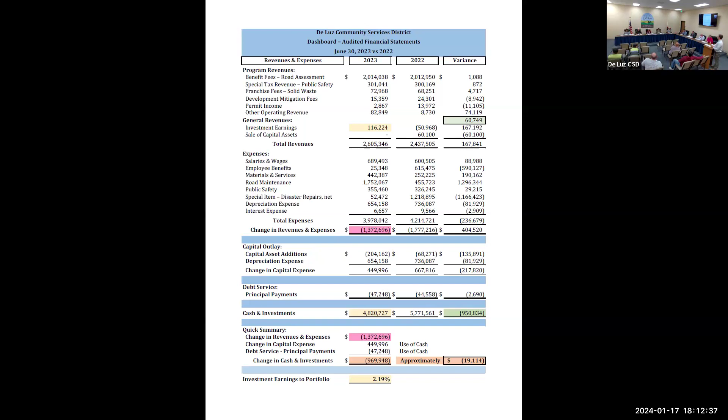Got it. Any other questions or comments? No. Oh, quick question, one quick question.

I think there's something we're curious about, something Jim was talking about last time we spoke, about the gas tax. Is there any movement on that revenue? Well, that's the next item. We're gonna sit tight for a little bit, we're gonna have another bill.

And then our lobbyist is on the screen, and he's gonna give a report to the board about where that stands. So stay tuned. Will California be nice and approve?

Yeah, we're still, just don't place any odds right now, but we're being optimistic. Very good, thank you very much.

Well, thank you, thank you. Good job, everybody. Thank you, Robert. Thank you, Colin. Yes, thank you, we met our commitment.

Very good, okay, moving along here. Agenda E, information. The following items are intended for information purposes only, and they include the financial statements, second statement of investment policy. Directors, any comments or questions?

No? Okay, then we'll move on to the next item here very quickly, and that will be Agenda F, the consent calendar. That includes the minutes of the December 1st, 2023 special board meeting, minutes of the December 2023 regular board meeting, general fund claims for December 2023, sheriff's special tax claims for December 2023, and purchase orders, of which there were none.

So he's gonna just show you a little bit about that project. It's really not significant anymore, but it sure could have been. So anyway, go ahead and show them what we have.

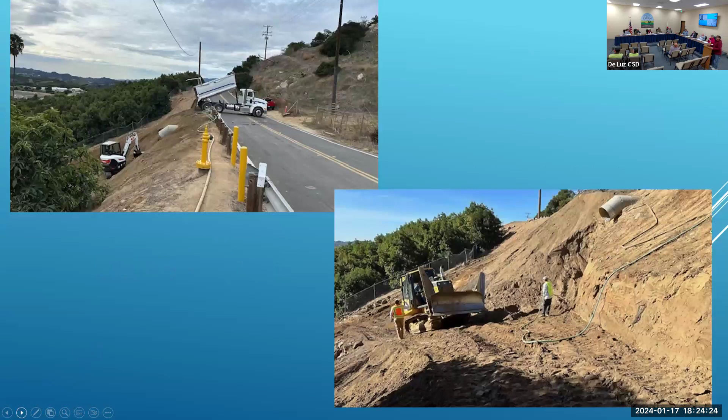Hi everyone, I'll start with this emergency work, which we had, and it's now completed. This is how it looked when I inspected it. This is where they are dumping dirt to fill up that hole.

The second step, in the lower picture, you'll see they are cutting into benches. We had it tested on site, and we approved all the compaction on it.

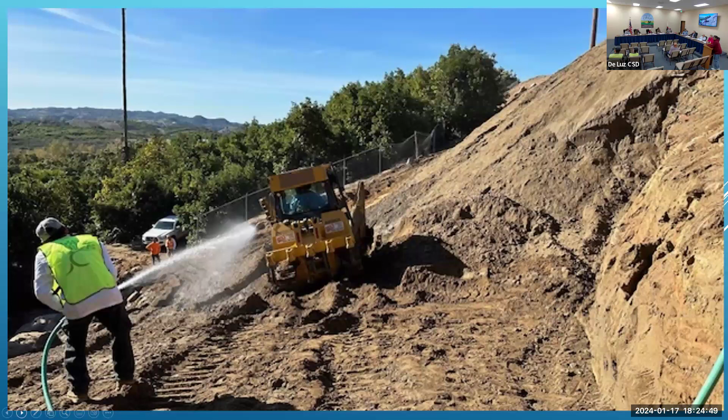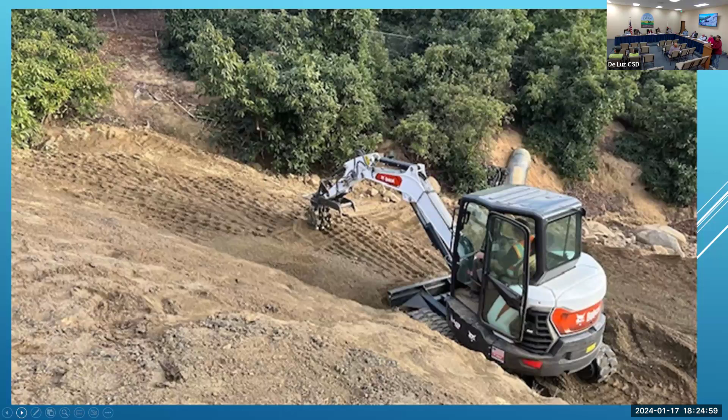Next picture, they are rocking around that washout. Next, they're compacting it here, layer by layer, bench by bench.

This is pushing dirt on the other side, where you saw all the ruts in the beginning. All these ruts are being filled up and pressed down for compaction. He's just tracking it.

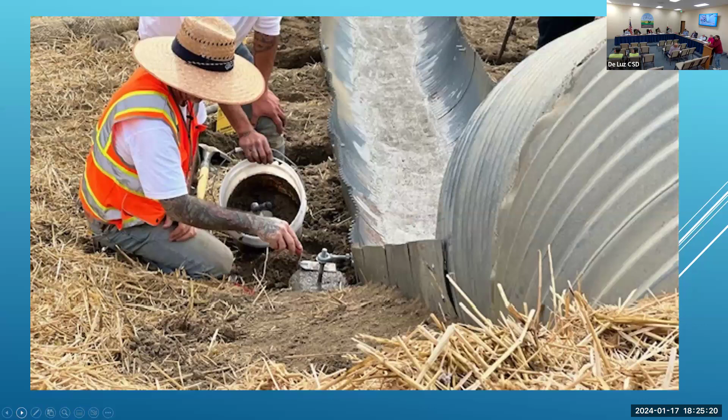This is a picture of our outlet drop, or half the pipe, where the water goes from top to bottom. We are putting anchors on each joint. There were 10 joints, 10 feet each, so 100 feet total from top to bottom.

So every joint is being anchored. You see that anchor, he's putting it in there. Next picture—they're working, so they're on the second one now.

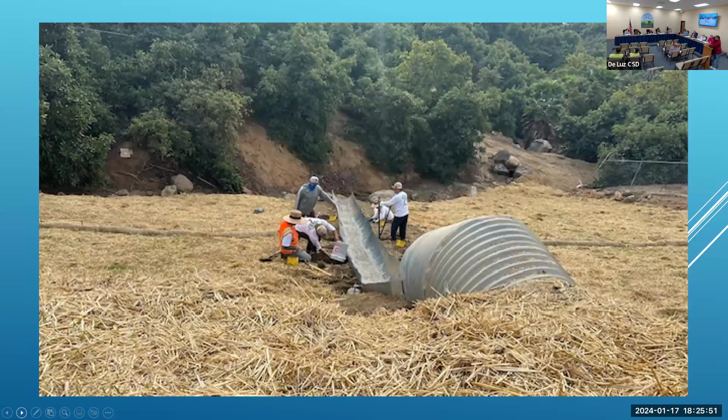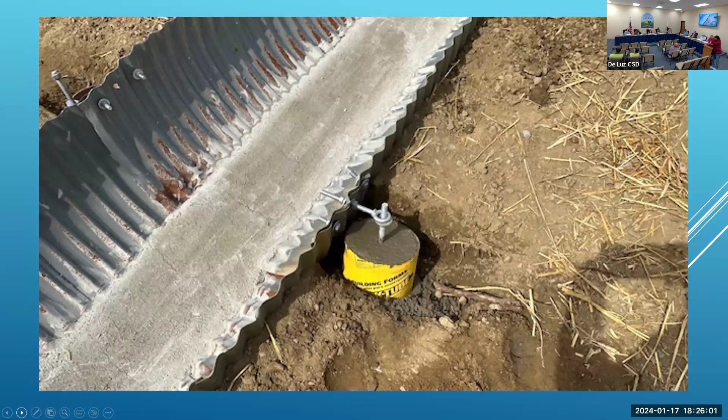This is how it looks. They put a bolt on top, a nut, to tighten it up, double nut, so nobody can take it out. Next picture, please—this is final, that's how it looks right now.

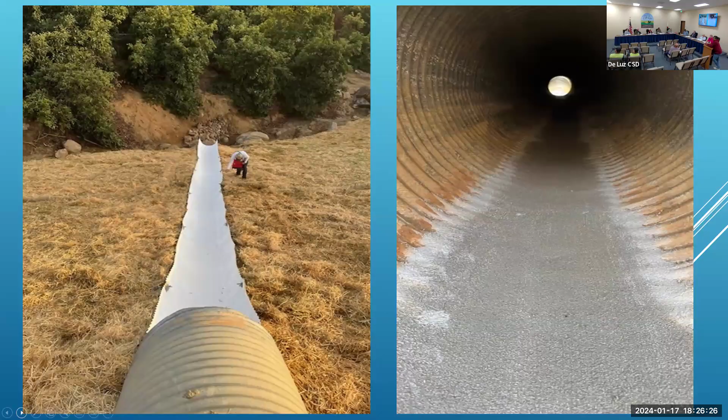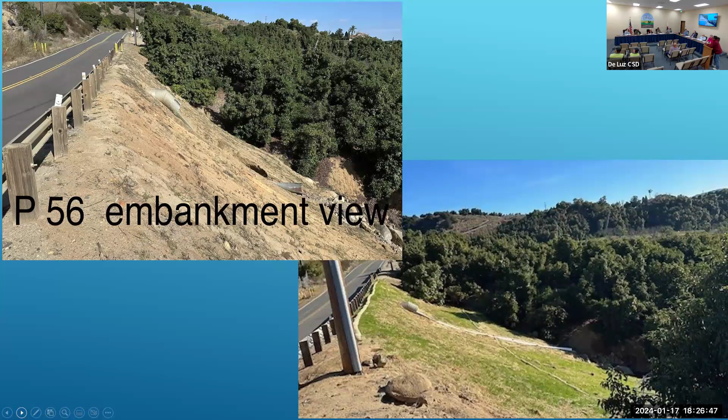This is the embankment on top, how it looked in the beginning. At the bottom, you see the grass growing with the BMPs on top and sweep stuff, so there shouldn't be any washout. If it occurs from the rain, it will stop it.

Next, this is on the north side now. We are not on the embankment side anymore, we are on the north side of the road. There was no way the water would have made it to that catch basin, or culvert.

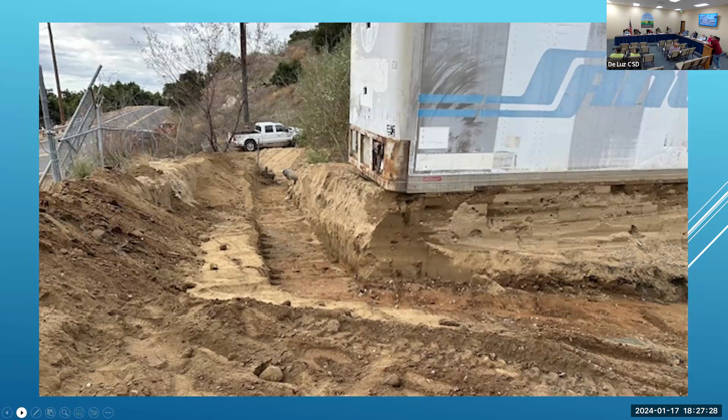Next slide. This is outside where the road is. We made a berm so the water doesn't go through the fence—it has to go down and around the gate into the catch basin.

At the bottom, you see we built a concrete wall so that no water goes underneath the pipe. That wall is 2 feet down from the pipe.

Over the last year or two, I've been seeing this guardrail damage, so we took it out and replaced the guardrail. Next slide—you see how it looks right now. This job is basically complete.

Oh, it never happened again. Thank you, any questions? No, well done, thank you. Okay, sure.

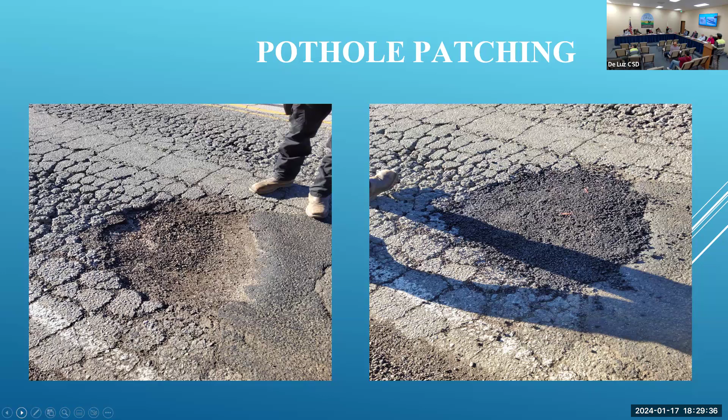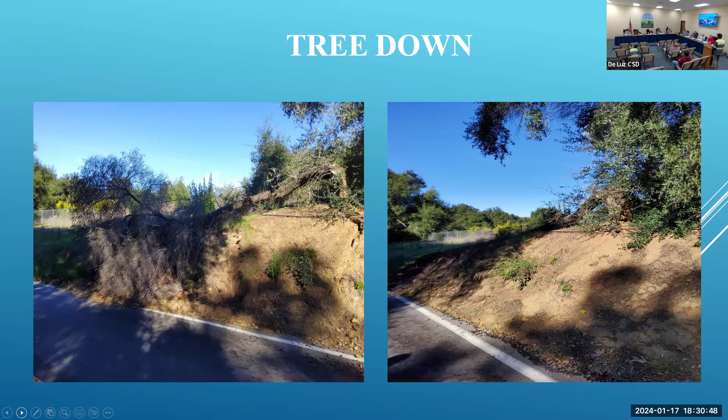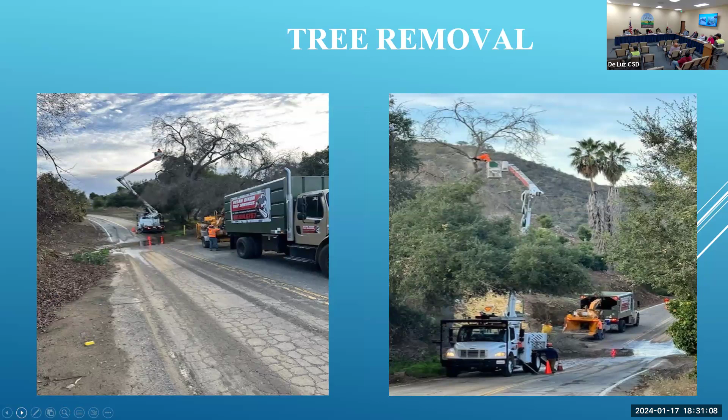We actually had to do a full tree removal on Cali Garden as well. This tree was dead, so we had to call Dylan Dixon's crew. As you see, we don't really have equipment that can get up there like that, so they were the best guys for the job. They worked their way from the top all the way to the bottom. Next slide, please.

On the left side you might be able to see, towards the bottom, the bark's kind of missing. That's where it started rotting out. It actually had a split in it, so we didn't want a crazy wind to come and basically knock it over, and then if there was any luck, a car coming by at the same time - that would have been a really bad situation. So they took it all the way down, and that's some of the scrap pieces they finished up with, but they basically chipped all of it. And then I think that's it for me.

If there's any questions? In the second slide, you mentioned the Sandia Creek patching. Is there a more appropriate way of patching, because every little rain it happens again - people go fast. It happened to me that people went to skip and they passed the double yellow line.

I get what you're saying. Our most recent technique, we added base into the hole, so that hopefully it'll give it better compaction, and so far that has worked. Our most recent patch hasn't popped out, and I know we had one rain before we did that, so right now it's good. I know that area will need probably a full replacement because there's alligator cracking everywhere as well, but as of right now, our most recent patch is working.